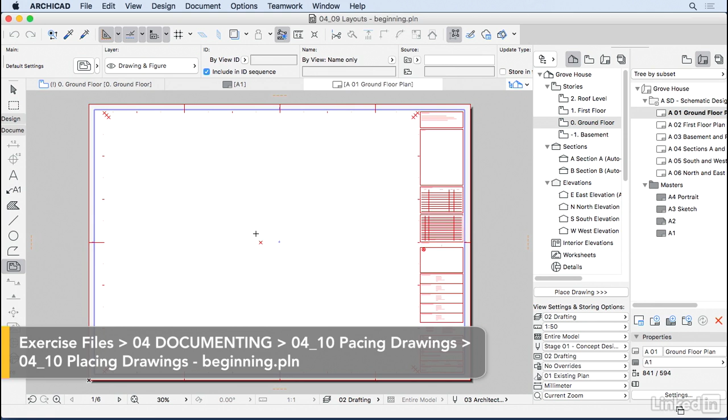Now that we have our layouts ready, let's place some drawings. We're going to be using this drawing tool. I'll click on the drawing tool and click on the layout, and ArchiCAD is going to ask what view I want to place in the layout. So I'm going to choose ground floor.

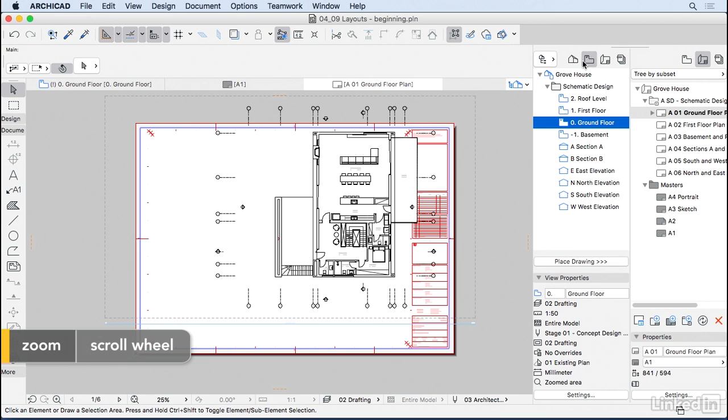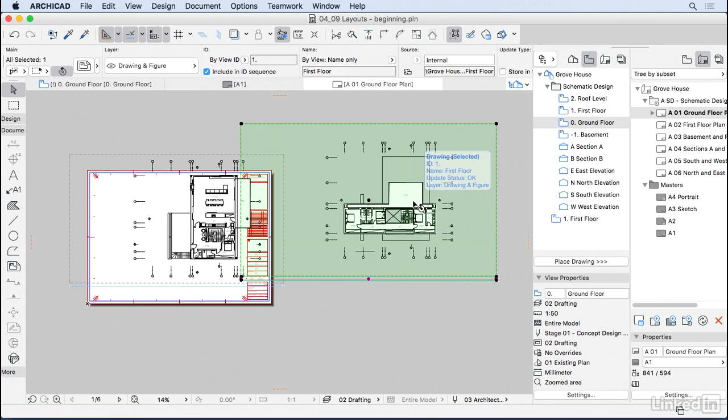There's another way to do it, much easier. I'm going to delete this drawing. All you have to do is make sure you are on the view map and drag the view here, avoiding dragging the drawing from the project map. For instance, if I drag the first floor from the project map, ArchiCAD will bring the drawing but also create another view you may not want, resulting in a very messy view map. So I'm going to delete this drawing and view, and stick to the views we've already created.

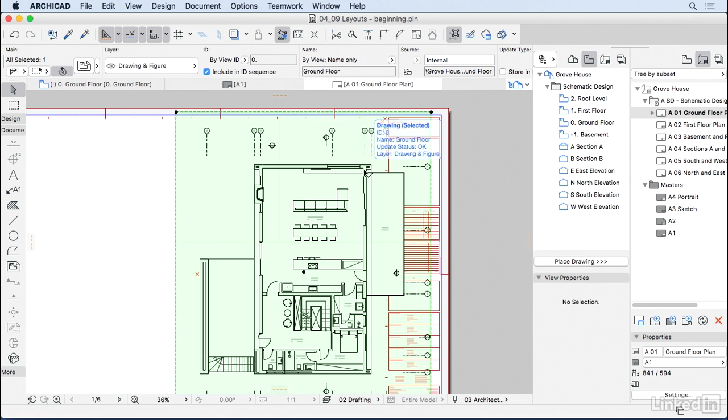So how does this drawing work? It's like a portal to your drawing. You can move it around, reshape it if you don't want to show everything, and reposition it. Just make sure you have the move sub-element active on the pet palette. I'm going to click on one of the edges of the drawing, make sure I have the offset edge, and start resizing this drawing.

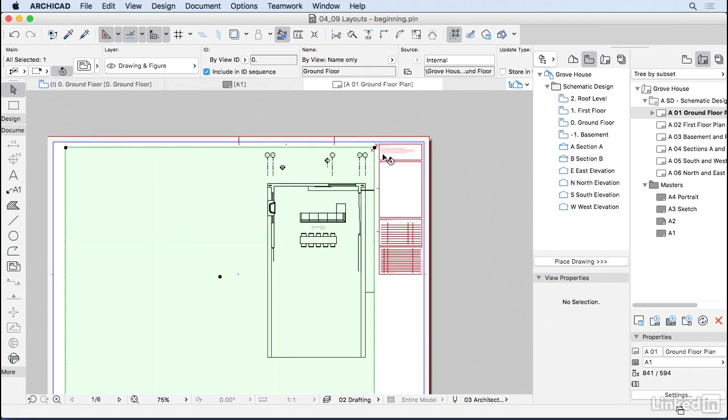That's why on my layouts I usually put some points that don't get printed, but I can snap onto them when resizing my drawing, so I know the limit of the sheet. So I'm going to reshape it here. I might have to go a little bit higher. Now I'm going to position the drawing horizontally. I think I went a little too far, so now let me make sure everything is inside the viewport.

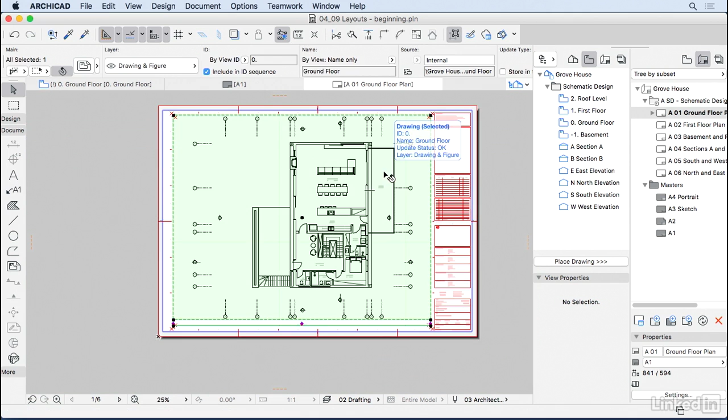That's better. Now let's check the settings for this drawing. I'm going to select it and use the shortcut Command T, or Control T on Windows. In the settings dialog, we can change the name of this drawing, which is what goes on the drawing title along with the number. Right now ArchiCAD is using the same number we gave for the view, which is 0 and ground floor.

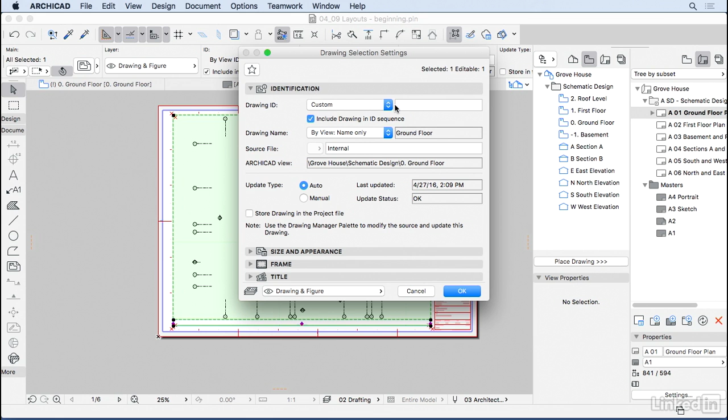You can choose a custom number if you want, but I'm not going to do that. I'm going to keep it by ID. Another thing you may want to check is the title. There are different kinds of drawing titles to choose from. I'm going to stick to the built-in drawing title, but right now I don't like that it's stretching all the way there.

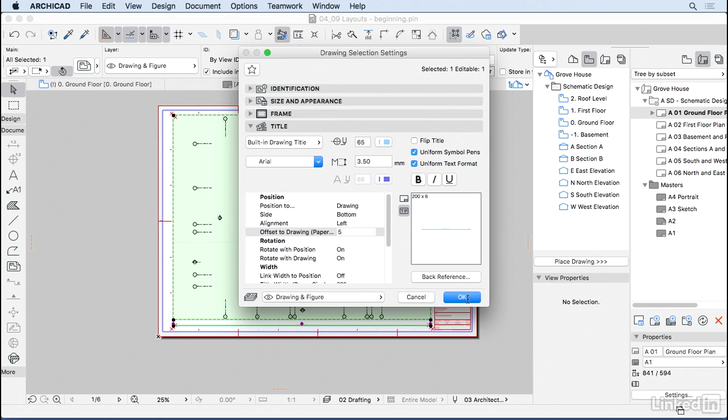So I'm going to go to width, link width to position, and say no. Title width, let's say 200, should be good. I also think it's too far from my drawing, so I'll change the offset to the drawing to 5. The position is bottom left, so that's good. I'll press OK, and that's much better.

So I'm going to use the eyedropper to make sure that every new drawing I place on the layout follows the same settings for the title. I'd like to show you another way to do this.

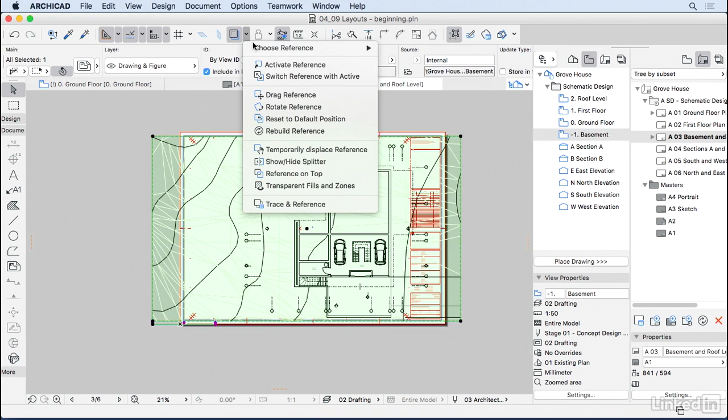I'm going to place the basement and roof level together in one sheet, and use the trace and reference to see the first sheet that we set up. I'll go here and choose reference, browse for trace and reference, and instead of choosing one of the floors, I'll choose one of the layouts - the ground floor.

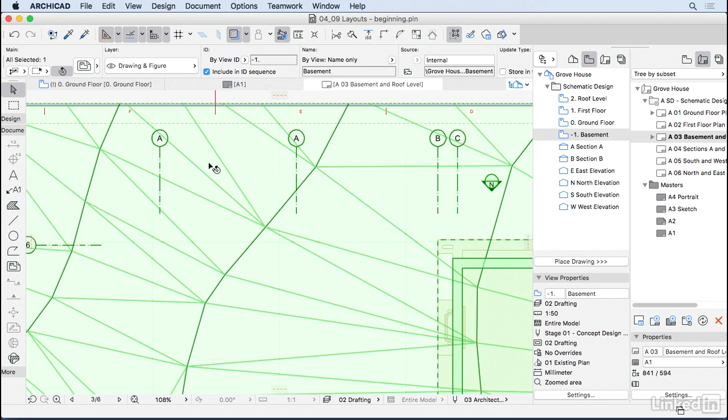Now we have the ground floor as a reference, and I can position my drawing exactly on top of it, so the sheets are consistent with the grid in the same position. I can also keep the same position for the rest of the drawing. But for this ground floor, I don't need to see everything that should be under the ground, so I'll finish the drawing here. You could, if you want, put a dashed 2D line here. Now I can hide the reference since I don't need it anymore.

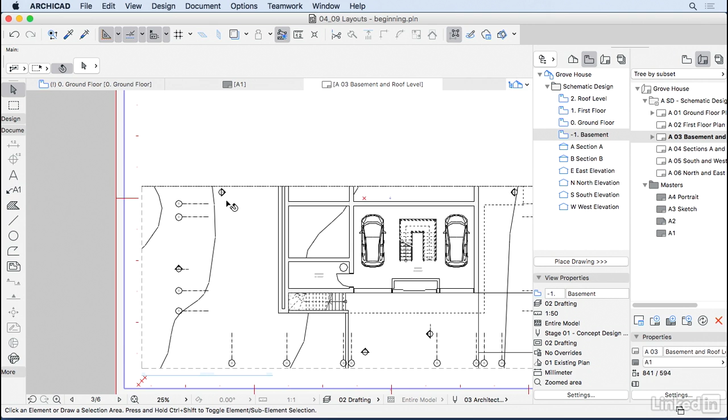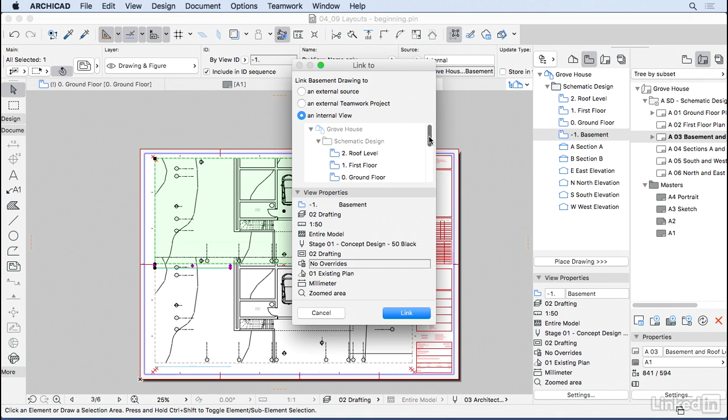I'm going to move this drawing, copying it, by pressing Command D or Control D. In the middle of the process, I press Option on Mac or Control on Windows, and copy this drawing. Now, instead of dragging the roof level, I'll right-click on this drawing and say Link Drawing To, so I can choose another drawing - I'll go to roof level and press link. ArchiCAD will keep it in the same position.

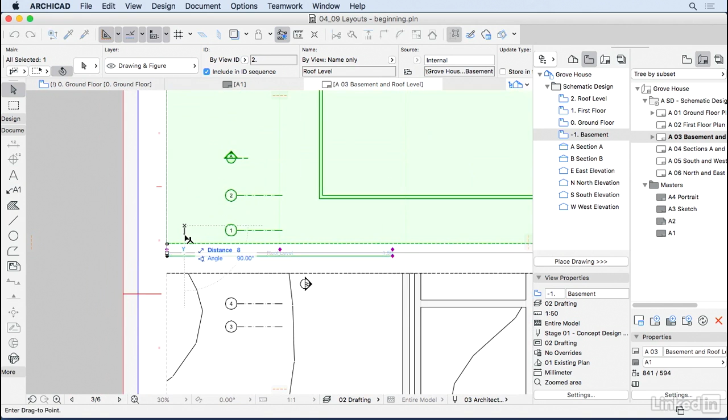I don't really need to see this grid since I'm already seeing it on the drawing below, as long as they're in line. So I'll reduce this, bring it down a little bit - that's a good distance, a little more. But let's say I want to see the grid on top. There's a little trick we can do.

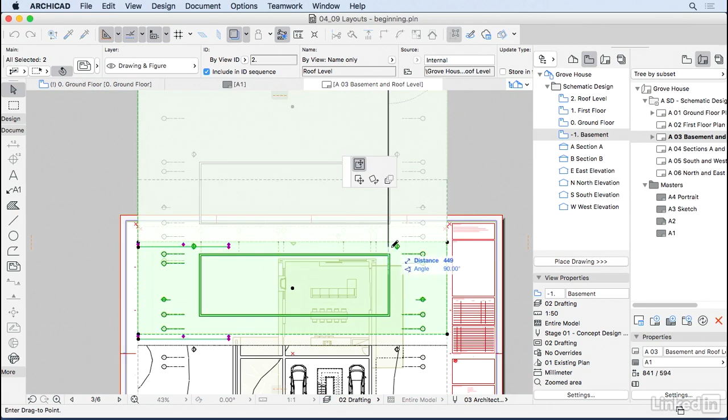I'm going to again drag and copy this layout. Let me stretch it a bit so we can see the grid, and move this drawing down. I'll turn on the reference again and position my grid exactly on the same place as the ground floor, then reduce my drawing down again, and reduce it up as well.

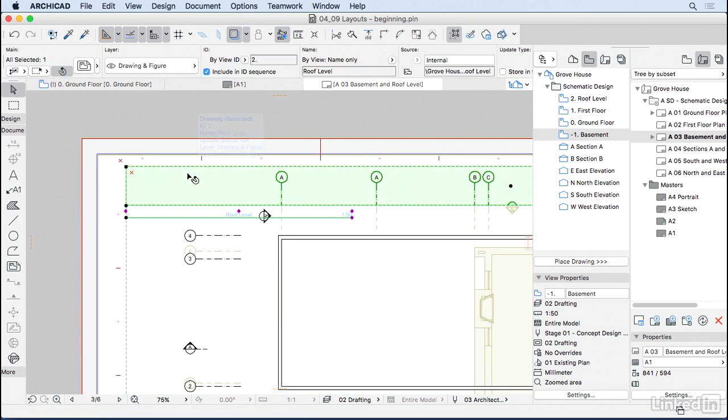I don't want a drawing title for this one, so I'll select it, go to settings, and on drawing title say no title, press OK. Before we finish, let's fix this guy - I'm going to move this drawing a little more down, making sure I'm still inside the drawing.

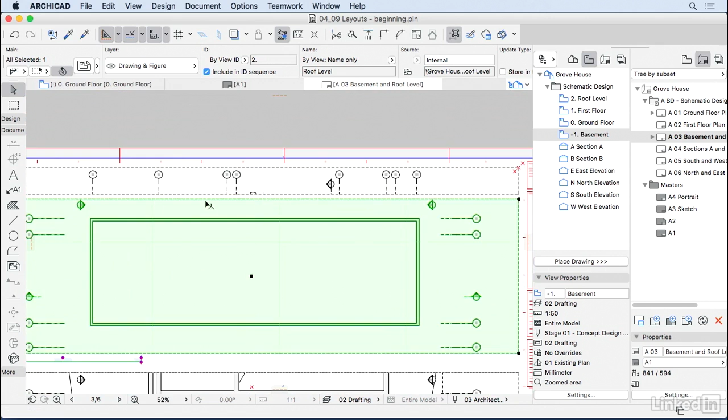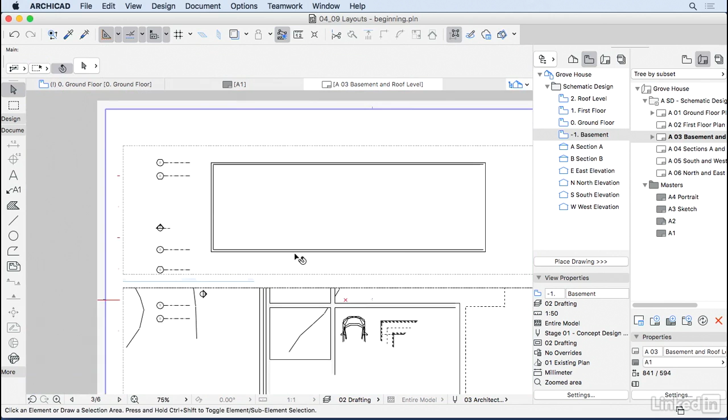I'll try to reshape this one and make sure we have that north symbol there. The north symbol is there, but the west is not, so I'll drag it down a little bit. Some fine adjustments you have to do when placing drawings. That's good, there we go. This is a little trick to avoid having to go back to the floor plan and create a new smaller grid - you can do everything here by having two drawings of the same view.

So go ahead and finish placing the drawings for the other layouts.